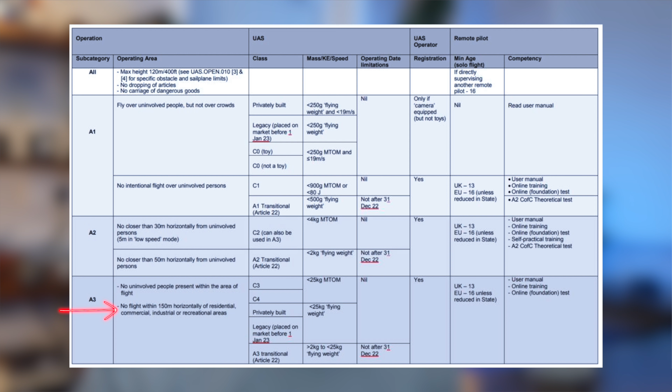Then in the specific category, you need your GVC. It's where we're flying at an increased risk. And you need to understand Article 241, which is endangering the safety of any person or property. You must not fly recklessly or negligently or cause or permit an aircraft to endanger any person or property, and you'll need to do the required training. And then lastly, there's a certified category, which is flying at high risk. So this is equivalent to manned aircraft operations or carrying passengers with a drone. So all this information is in the CAP 722, which is the civil aviation publication, and that's where all our drone regulations have been laid out.

And in this next section, we're looking at avoidance of collision, and the incident and accident is recorded in the CAP 382, and that's where the mandatory occurrence reporting scheme is laid out. Again, there's links to all this down below. Mandatory occurrence reporting, known as MORS, now requires the operator to report all serious incidents and accidents on ECCAIRS, the European Coordination Centre for Accident and Incident Reporting Systems. Accidents involving people must be reported to the AAIB, and with any airspace incursions, you need to get a witness statement and take any photos.

Then there's a UK Airprox board, which you would use the form CA 1094. And these are all worth remembering. And there's a useful chart here of what to do when you had an incident. Where does that fall and who do you report to?

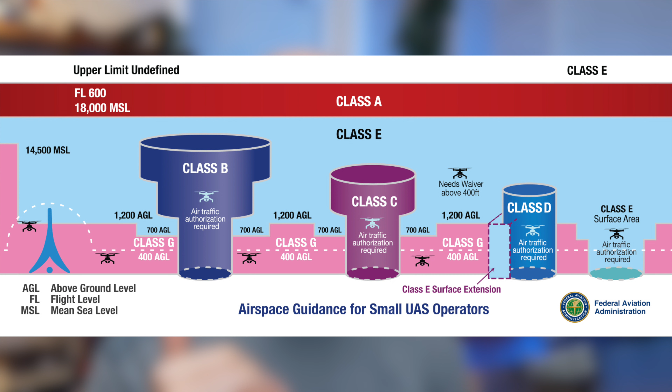D are the lower levels around airports that are below 10,000 feet. E is local terminal maneuvering areas, and so all other airspace is uncontrolled, and that's called Class G. The thing to remember is that it is also used by helicopters, and they're not limited to 400 feet and could be flying below that. Most other manned aircraft would be flying above 500 feet, so there's a 100-foot separation distance there.

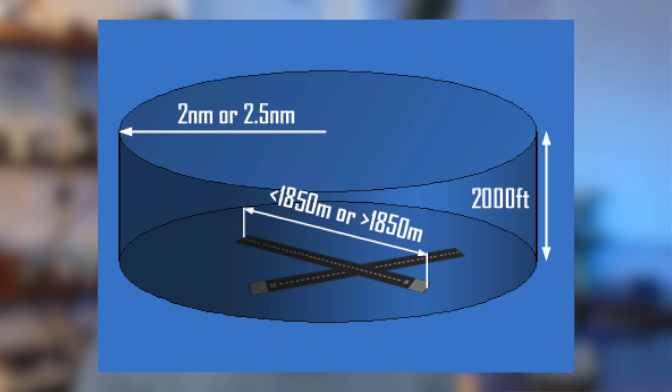So if we look at flight restricted zones, an FRZ, and aerodrome traffic zone, an ATZ, an ATZ is a 2.5 nautical mile circle from the center of the runway and from ground up to 2,000 feet with a radius of 2.5 nautical miles around the midpoint of the largest runway, for aerodromes where the longest runway is longer than 1,850 meters.

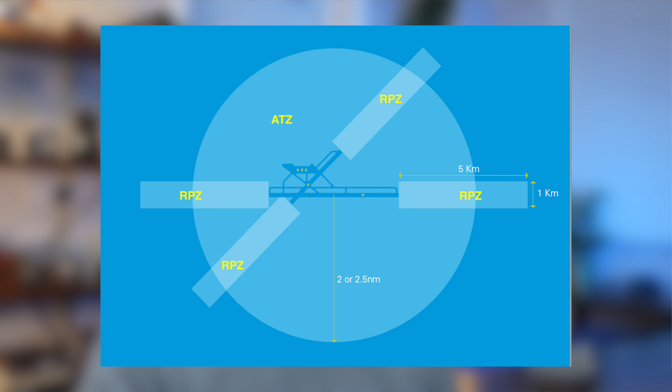Now, the runway protection zone has been added more recently over the last couple of years, and that is 5 kilometers from the end of a runway, and it's 1 kilometer wide. And you can see this from this diagram. An aerodrome traffic zone plus a runway protection zone equals the flight restricted zone, so that whole grayed out area.

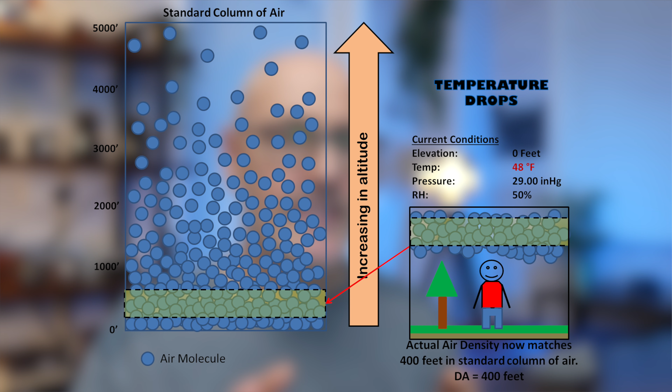So now if we move on to the second module, we're talking about weather, and things to take into account is with higher altitude you're going to get lower pressure, the molecules are going to be less dense, the air is going to be less dense, and so that's going to affect the drone's performance. It's not going to perform as well in the less dense air. If you think about the propellers having to push against a material to create lift, well then if it's less dense, then there's going to be less control.

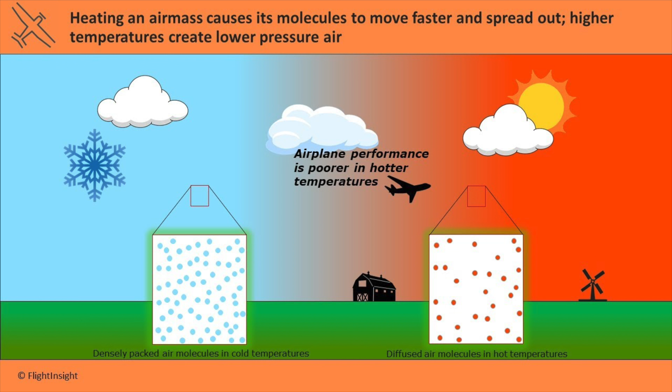And so when it's colder, it's going to be denser, and when it's hot, it'll be less dense because the molecules are expanded and moved away from each other. So again, in hot air, there'll be reduced performance. So that means the best conditions for generating lift is on a dry, cold, winter's morning near sea level. If you were to look at the extreme example, the worst conditions are in the middle of the summer, high up in the mountains, in a tropical rainforest at midday, for example.

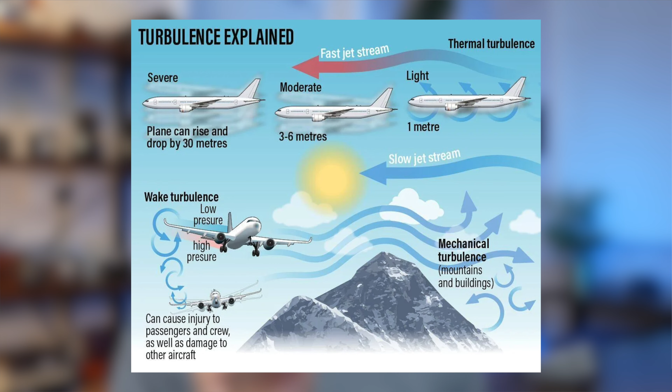So things to take into account then will be the wind speed and direction, visibility, weather, the clouds, the temperature, pressure, turbulence. Now with turbulence, there's the mechanical, thermal and shear to take into account. And these questions do come up in your exam, so you want to really make sure you understand those. And then there's the wind, the gradients, urban effects and masking. So that's all useful information when you're preparing a flight plan to do your pre-flight checks.

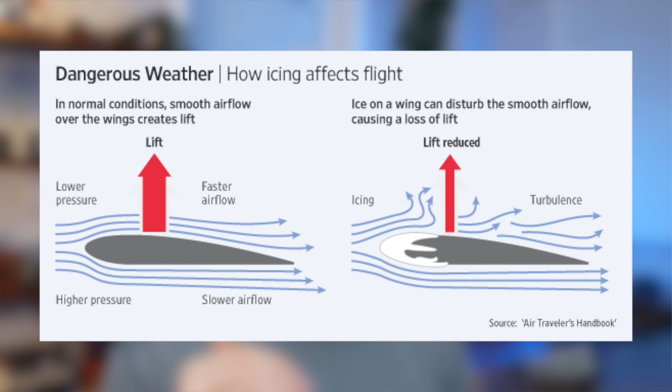Now when you're on site, you'll need to be looking at the weather conditions where you're flying on that particular day, and you'll need to know the speed and parameters of your aircraft as well. You need to be aware of gusts, any cloud cover, and any wind compression and how that will affect your drone. Another thing to take into account is getting icing on the props in cold, damp weather, because you're going to get that low pressure forming on the top of a wing, and so that can cause moisture to condense and you can even get icing on there, which would affect your stability.

So then next we'll just look at IP ratings. So IP43, IP stands for international protection, and the first digit is its protection from solids, and the rating of 4 will be protection from a solid object that's 1 millimeter. The second digit refers to protection from water.

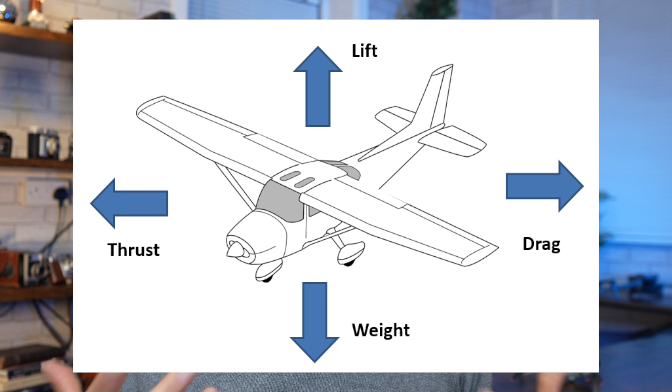So in module 3, we're looking at the operating guidelines. So we're looking at how our drones actually work. So in flight, it's created by thrust, weight, drag, and lift. So if you look at the diagram here, thrust is obviously the forward motion, it's counterbalanced by the weight going down, the lift that's drawing it up, and then drag by its sheer mass moving through the air.

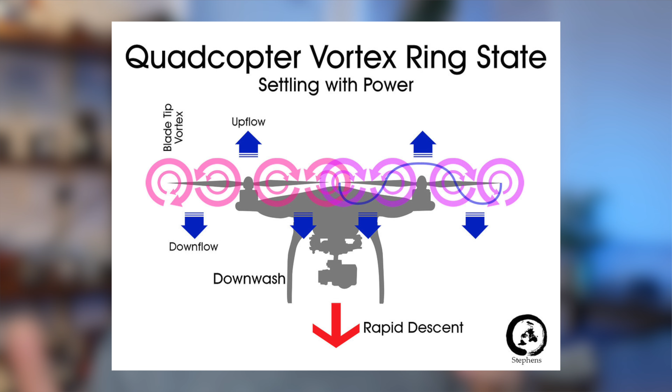You also want to understand vortex ring state, and that's as the drone is descending, it's the air coming up around it that can give turbulence, that can make it fly out of control. To counteract that, if you fly your drone into landing at an angle, then it will stop that happening. Although modern drones have built-in systems and sensors to make sure this doesn't happen, it's still a thing you need to understand.

And then we just look at the procedures for setting up your drone. Have you checked the calibration on the IMU? Have you checked the calibration of the compass? Do you know how to shut off the motors in an emergency? In-flight procedures under normal operating conditions or under abnormal operating conditions. You need to really understand this, so that's why it's important to know your drone and read your manuals properly.

And then post-flight, this is all about recording all the information from where you flew, the takeoff time, the landing time, any abnormal occurrences, etc. And your performance operation envelope, as we call it, is also something you need to know. So things like what's your battery life, what's the usable temperature for your batteries, what's the correct aircraft temperature so you know you're not going over that, what's the maximum speed, what's the maximum gust it could fly in, and through this you can do your setup checklist.

Next is understanding emergency procedures, so loss of power, loss of the GPS signal, what happens if you have a flyaway, a fire, structural failure, pilot incapacitation, an air incursion or a ground incursion, and what your fail-safes are, e.g. your return to home, your loss of a GPS signal or your connection to the RC, or if you suddenly get a low battery, and what's your kill switch, like what's the emergency if you need to stop your drone flying immediately.